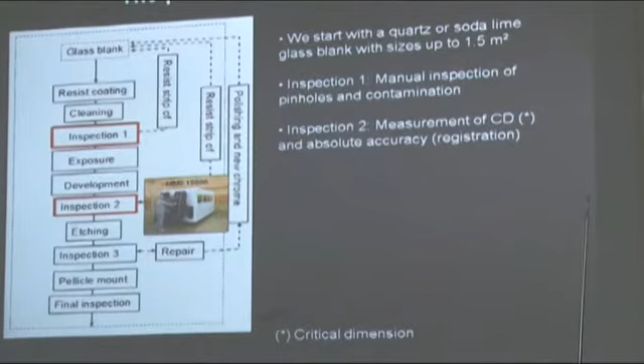After the exposure, you do a development, and before you do anything more, you check the mask again - and that's actually where we come in. We've developed a system called the MMS 15000 that's used for this inspection, and we measure two things: absolute accuracy and CD, critical dimension. Critical dimension means how much the line width on the photomask varies over the whole surface - that's one of the most critical measures we developed the MMS 15000 for. And also absolute accuracy, how much the pattern deviates over the whole surface relative to the Cartesian grid.

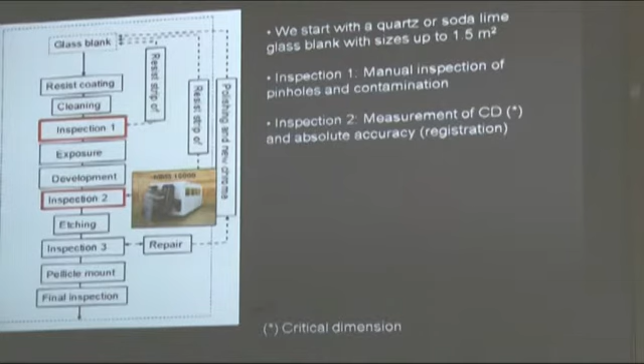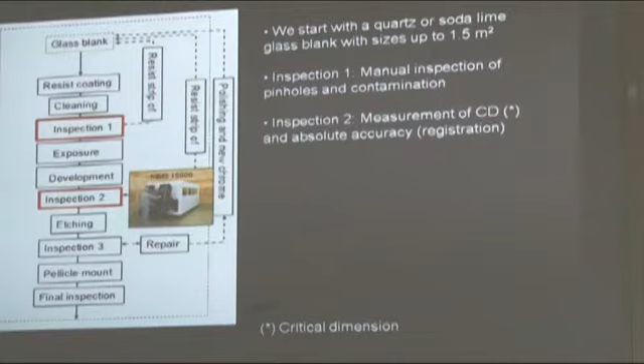At this point you can still save the glass because you have the possibility to polish it and put on new chrome. So there's an escape route in the value chain here. Some companies use this possibility - after the measurement, you can redo the plate, so to say, and start all over.

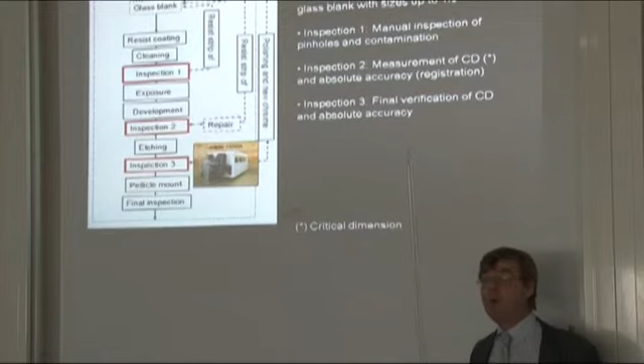After this step, you do an etching of the plate, and now you remeasure again - you verify more accurately because now you're measuring on the pattern itself, on the chromium pattern after etching. So that system is used again, and in this situation you can polish and put on new chrome, but that's a quite expensive process, as I said before.

What I'm going to do then, if this mask is okay after this, you have the possibility to ship it away. If we go to a step and show that accuracy, the specification accuracy we are talking about today is about 200 to 300 nanometer, 3 sigma range over this whole plate.

And the plate is quite big, as I said before. So we need to make something to do the system that can measure this. I will talk about that later, but also the last thing here, and this I think is very important: there are no defects tolerated afterwards, because this is a photo mask used in a production system that generates millions of TVs. So if there is one defect on the photo mask, that's not accepted. That is quite tough.

So if you look back then, we turn it 90 degrees and we can then see what this is really about in the practical life, so to say. And this is an example of what happens in costs. I can tell you the price for a photo mask, just the glass piece, could be as much as $1 million, just the cost of one glass. So if you have to destroy this glass, or ship it to a customer where you haven't done the metrology, it's a disaster from many, many aspects.

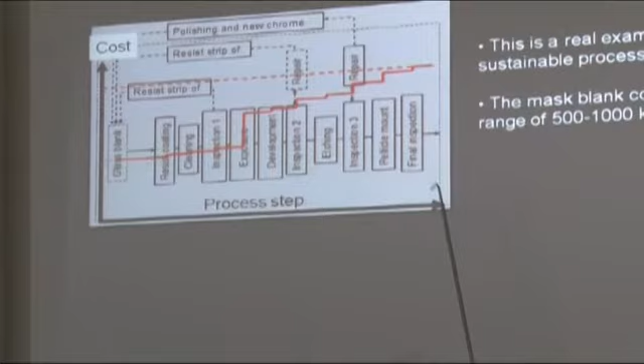And if you see here, this is actually the cost, how it affects during the process. Of course, these are secrets from the industry, but as we have been working with this industry for many years, we have quite a nice, good figure of how the cost distribution actually is in practice. So you can see here that the first step, you start with the cost of $1 million, maybe, or maybe less, depending on the size of the glass.

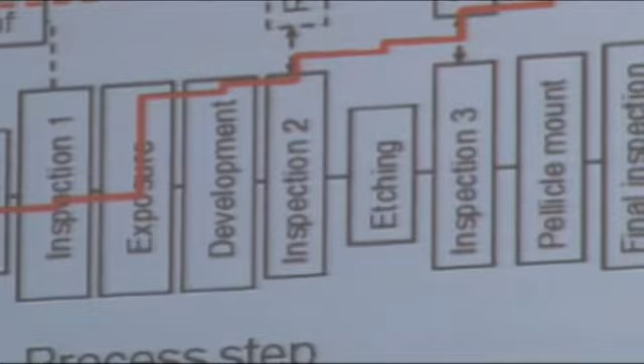Then the exposure step is quite expensive because they use a really, really expensive system delivered from the Swedish company Micronic MyData, and it takes many days. So you build up a value that is quite high, just in the exposure step. After this, you have to do inspections, and you can see the inspection cost adds a bit because it takes a long time, and also the final inspection, and the pellicle mount.

The pellicle is a piece of plastic, a small little frame with a piece of plastic on it, that is used to cover and protect the front surface of the glass. Only one supplier in the world, some years ago—now there are a little bit more—can do this really high quality cover and this plastic pellicle stuff. So it's a very, very expensive piece of the mask, and that is put on as the last step.

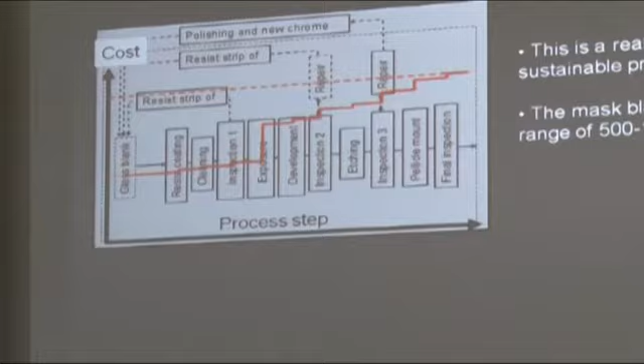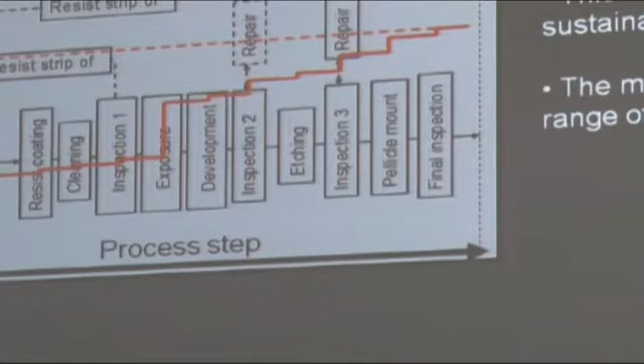And then they do a final inspection, and this final inspection is also done manually. There are some systems that can be used, but a lot of this work is still done manually in this industry. So you can see that the cost of the final product is about double the cost of the glass blank. And that is a rule of thumb you can use in this industry. So these photo masks are quite expensive.

So in this process, it's quite clear that metrology at several steps here is key for saving costs. It's so obvious that if you make a mistake by just not having done the measurement, or you have found defects—there are other systems used for finding defects—if you fail there and the mask is shipped to the end user, like Samsung, LG or Sharp as examples, it's a disaster. You are not allowed to fail in Japan. So if you send a mask that is wrong from the beginning, it's a big loss of face, and the Asian culture doesn't like face losses.

So after some years, when we had been in this area, there was a strong push from especially one of our customers that they wanted to have a metrology tool that could be used to measure these photo masks. So I will tell you a little bit about this tool and how we developed this machine.

First of all, I want to show you this figure. Actually, the metrology tool is built on the same principles as our writers. We also make writers, and that is the really big thing that we started with. So we have a lot of experience from our writing systems. What we're going to do now is develop a machine that is able to measure with very, very high accuracy over these large areas. This has not been done before, so it was a real challenge.

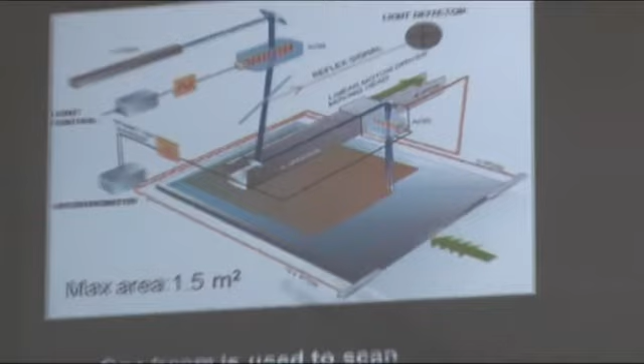There are some key figures here. What you can see here, you have a table where you put the mask on. You have a laser that is green today. In the beginning we used two lasers, one blue and one green laser in the same machine. And the reason was that Murphy's law tells you that when you have this very difficult mask with this thickness of chromium layer, the reflex will be zero because of interference effects.

We wanted to change wavelengths, but today it's only the green light we're using. We have a scan width, an acoustic deflector here that is making a small microsweep of 200 micrometer. We have a resolution in the system of a quarter of a micron.

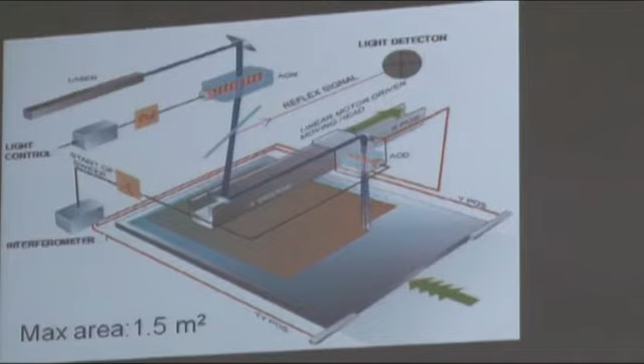And the registration is not a word that maybe so many of you are familiar with. So I'm starting to change now - it takes a long time. You have to use the word accuracy, it's the same thing, but in our industry we use the word registration. So everyone in our industry understands registration, they don't care about accuracy. But I'm trying to be a little bit more production engineer now to talk about accuracy. That is the specification of this machine: 3 sigma over this large area.

So, first of all, when you make a machine like this, the environment control is very vital. We are using very, very sophisticated materials. For instance, we are using Zerodur, a very sophisticated glass for the table that has a temperature expansion of 0 in the 20-degree range, from 20 degrees to 23 degrees.

We developed a new measurement method that we call random phase, a special way of making images in the time domain instead of the spatial domain that is normal for all CCD camera images. I cannot go into details. What we did was these two things: we had two fundamentally different hardwares to grab images in the 2D images. And the nice thing is that we could develop two metrology algorithms, or methods, that can compete. So we could actually find the best compromise of these competing algorithms. That was really powerful.

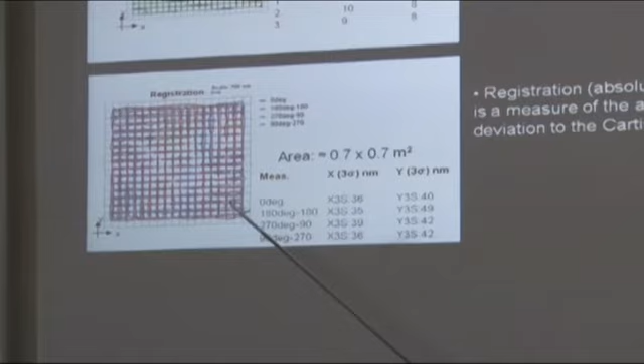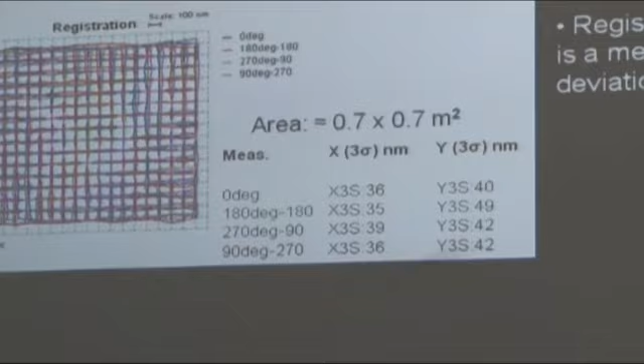But the last thing here is the real thing that counts. This is the absolute deviation to the Cartesian grid. These are 4 measurements: 0-degree, 90-degree, 180-degree, 270-degree, and 90-degree measurements again. You measure with the same golden plate or artifact, the reference plate, and when you back-rotate this and compare each measurement, you calculate the deviation to the Cartesian grid. That is around 50 nanometers over this area.

And so far, no one has beaten us in this.

First of all, repeatability is very important. But the next step is registration - you cannot do good registration if you don't have good repeatability, because in this step you are actually doing a real calibration to the physical coordinate system, the Cartesian system.